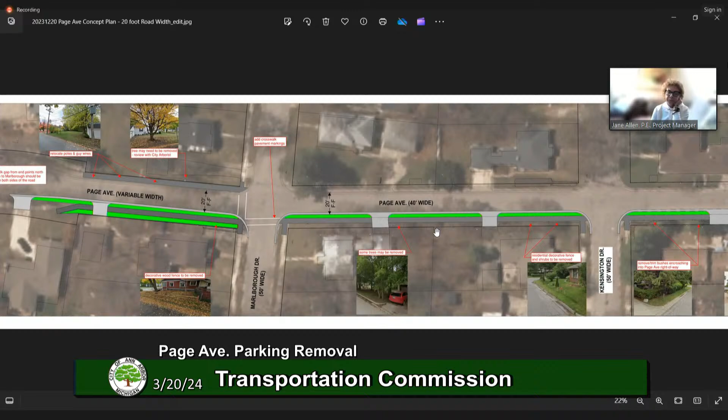So it goes here, and we're going to put it on both sides of the street because they had existing sidewalk up to Esch, so that made sense to finish that block with sidewalk on both sides. Then we have all the sidewalk and 3 feet of lawn extension for signs and a few street trees. We'll negotiate with each resident. It goes up to Harpst, and then Harpst and Esch both have sidewalks, so the system continues. We want to try to get all the sidewalks connected to each other eventually.

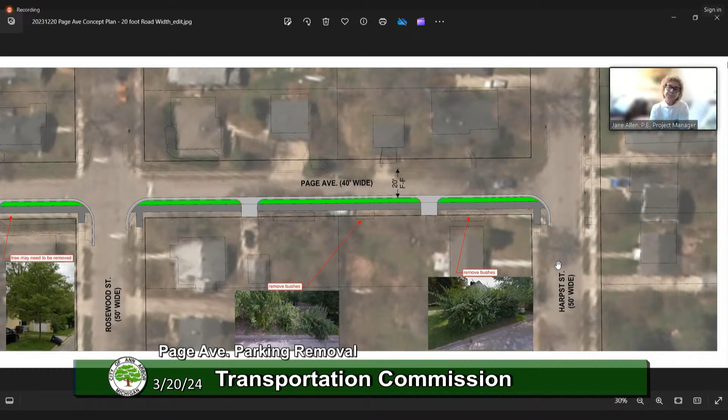Thanks, Jane. If I could add one note, one of the reasons we're bringing this to the Transportation Commission is that there's still a rule on the books that removal of parking for more than one block requires council approval. Since we're removing parking on one side of the street for roughly 3 blocks, this would have to go to city council for ultimate approval. We like to bring these matters before the Transportation Commission to get a recommendation from you all before taking it to council. That's why it's before you today.

One other thing to note is this street is very narrow. We looked very closely at the parking condition, sidewalk condition, all of that, and we feel the proposal in front of you is kind of a compromise, to still allow parking on one side and have a fairly calmed street because of how narrow it is, but also incorporate the sidewalk, which is lacking through pretty much this entire length of the project.

Matt, go ahead. Question for staff: are staff recommending this approach? And I think you said you did some public engagement along the corridor?

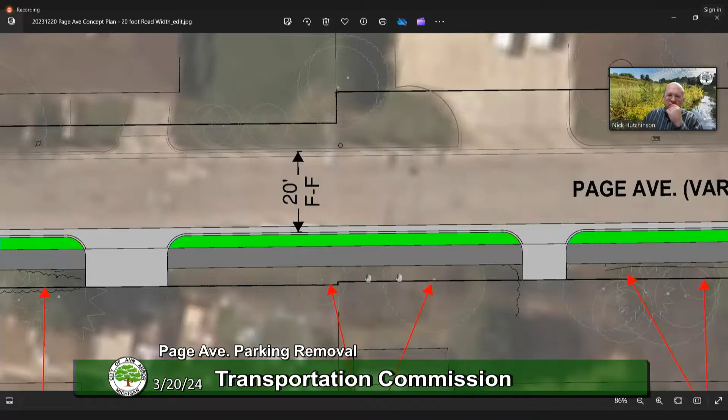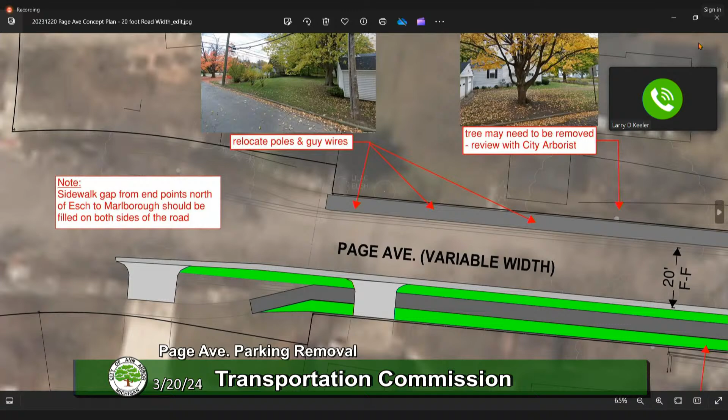I'll add to that. The funding was definitely part of it. We had enough money set aside to build sidewalk on one side, and to try to avoid a lot of those natural features. Moving the curb added a good amount of cost as well. It's a very narrow road, not a lot of space out there. We settled on getting a sidewalk on at least one side so pedestrians along this stretch can walk up and down the corridor. It's not to preclude that in the future a sidewalk couldn't be built on the other side, but it's tight in there, and this was the best we felt we could do for the time being.

So is it being funded by the CIP or from the sidewalk millage? The sidewalk millage. This is being funded from the sidewalk millage.

Peter? Yeah, I was also wondering about the decision to only do the sidewalk on one side. Realistically, when would we come back here and put that in? It will likely be a long time before we come back to put in sidewalk on the other side, because we have many, many miles of sidewalk throughout the city to do. I couldn't predict when we would be back here.

My sense on this is that we have a standard, complete streets, that has sidewalk on both sides, and when we deviate from that standard, it becomes that much more difficult to enforce. In places where people don't want sidewalks, I imagine this will be offered up as an example of a way to do a compromise, even though I don't think it's a good compromise. So that's my concern about coming up with a solution that only has sidewalk on one side.

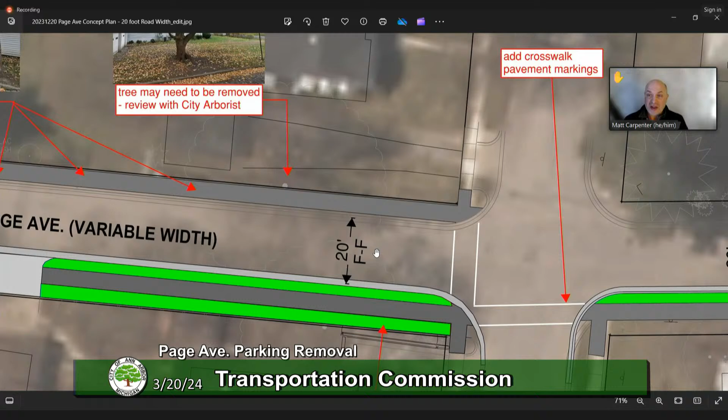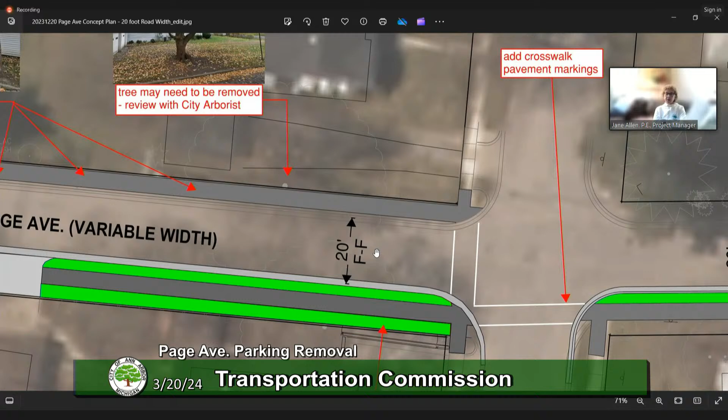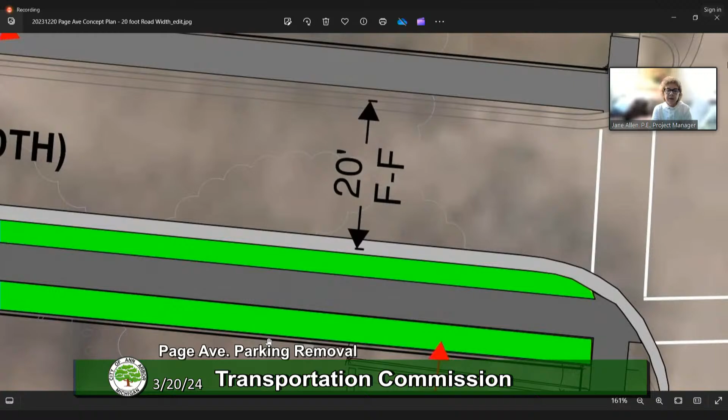When the project came to me, it was already decided to put sidewalks on one side of the street, and it was our job to decide which side that would be on. Possibly Nick could speak more to how it developed. But if you look closely at this 20-foot face-to-face driving lane, you can see the right-of-way, the very dark line - we were able to save some of their landscaping, because originally we were going to put the sidewalk right where that line is, and we would have had to take out a lot more.

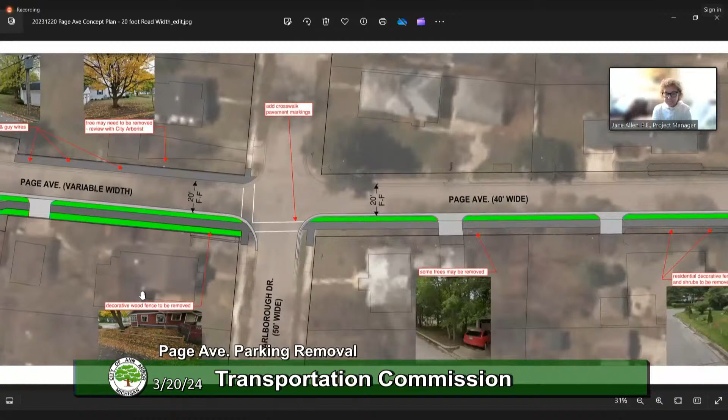Part of this comes down to, we have very limited funds through the sidewalk millage, and we can only do so much each year with the money available. So, is it better to build sidewalk on both sides of this very small residential street, or is it better to build more sidewalks in more places? Funding is limited, so that's part of it.

The impacts on building the sidewalk are quite substantial. That's why we're moving the sidewalk to the east side, to try to create more space to build it there. We'd probably have to do something similar on the west side in order to build sidewalk, which doesn't leave a whole lot of road left either. There are going to be cases where we bring sidewalk gap-filling projects forward where, for the time being, we're only building sidewalk on one side of the street, because the cost of building on two sides is so great that we have to pick and choose to some degree. If we had unlimited funding, we'd be building it on both sides.

I hear you. Yeah, sorry, I just wanted to interject that I did want to confirm that this right-of-way is narrower than most. It's 40 feet versus normally 66 feet.

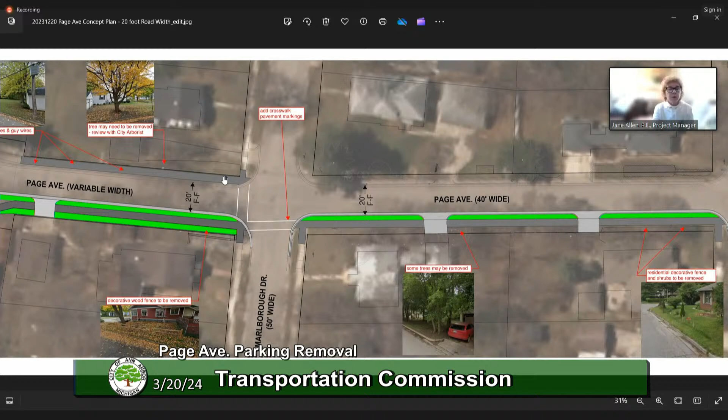We did get a variance to put the sidewalk here, right against the back of curb, because the transportation team didn't believe there was going to be a need for any signs in that location. If we were to do it on the west side in the future, we'd have to do it the same way, since I believe there aren't going to be signs there.

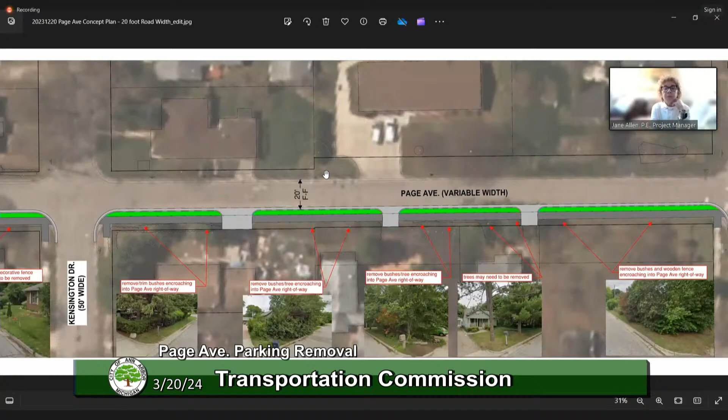So we'll have to get permanent easements from the residents. There is a block here that goes from 40, then it jogs out, one block that comes like half of one block and half of the other. We do have an increased right of way from the plat books, and we could shift the sidewalk within the right of way at that time, but we'd have to get some easements if we wanted to do it on the west side.

In the interest of not letting the perfect be the enemy of the possible, Mr. Chair, I would move to accept the recommendation as tabled.

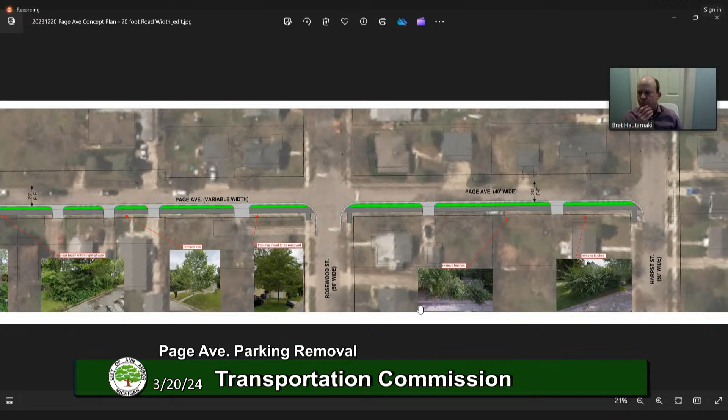Thank you. Peter? Yeah, I think that's probably the right thing to do. I would second that.

I would like to add, Nick, that if we are going to be faced with a situation where our sidewalk millage and the amount of funding we have means we need to make decisions about which side of the street to put sidewalks on in lots of places, then I would really like to see some effort put into decision-making guidelines in advance. I do not want to find ourselves going from project to project arguing about which side of the street the sidewalk should be on, with a lot of discussion and controversy over it. We need to decide what our guidelines are in advance, and then be ready to apply them. If there are places where they absolutely don't work, we can make exceptions in rare cases. But please, let's have some guidelines for that if that's what we're going to do.

Now, back to Matt Carpenter's motion, I would like to second it.

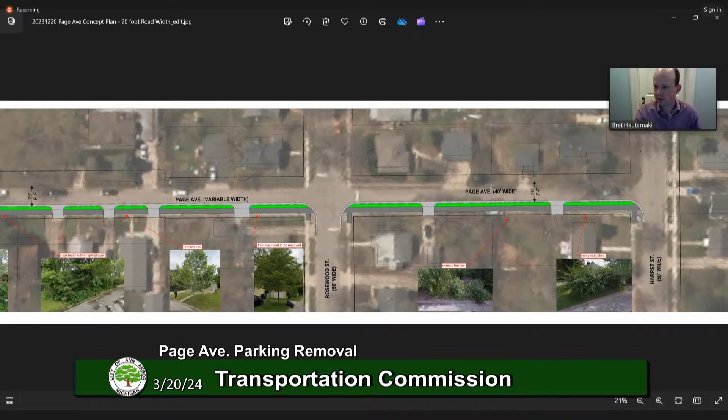So let me get back to the agenda here. What we're being asked to consider for the purposes of this business item is the removal of parking on one side. This isn't really implying approval of the design as a whole, but what we're voting on as a commission tonight is about removing parking from one side of the street.

So, is there any other discussion on the design or the motion to remove parking and send it to council?

Megan: I just wanted to make a quick comment that I live nearby and I'm excited. This is like a thoroughfare, a term we used while discussing it. There's a lot of people walking up and down all the time. So, would love to see sidewalks on both sides eventually, but I understood the limitations. I think this is going to be a good addition to the neighborhood. So thanks, staff. Thanks, everybody.

All right, so is there a motion to recommend approval of the removal of parking on one side of the street on page between Esch and Harpst? Moved by Megan, seconded by Wan Wu. All those in favor of the motion, please say yes or raise your hand. All those opposed to the motion, please say no or raise your hand. The motion passes. All right, thank you.

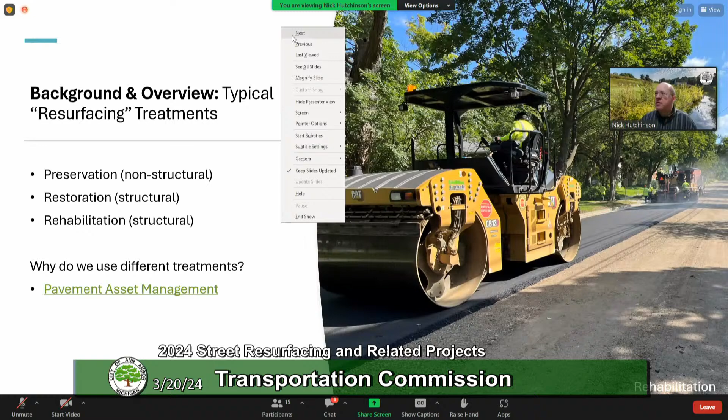Next, I wanted to look at some of the core elements of these treatments. The key thing is to repair or replace the existing pavement surface so that we get a nice, flat, smooth new road.

We do include some curb replacement as needed. That's mostly in those rehabilitations where we're taking off all the asphalt, either to repair curb that's in really poor condition or has shifted out of place, in order to maintain proper drainage.

This type of work is generally contained within the existing road footprint. So while we might be doing a patch of curb here or there, we're not tearing out the curb, moving curb lines, or widening or narrowing roads. For these projects, data collection and detailed design are pretty minimal, which helps keep the cost down relatively low and allows us to do more of them.

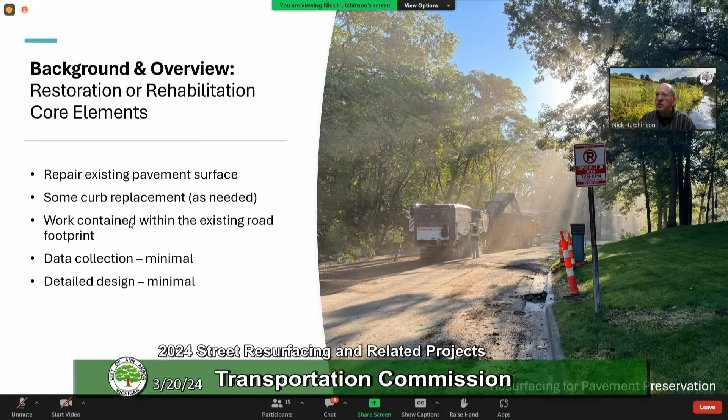Looking at other opportunities that go along with these projects, one is a little bit of work on drainage and stormwater. We may replace some curb to help stormwater flow better, but we also replace some storm catch basins, either to repair or modernize them. We also look at replacing sidewalk ramps that are not compliant with the Americans with Disabilities Act, which is standard practice for any of these resurfacing projects.

And then looking at opportunities to get us in alignment with our Vision Zero plan, and traffic calming and speed management. Many of you will recall that back in September of last year, there was a resolution passed by City Council for us to look at opportunities with all of our resurfacing projects for introducing traffic calming or speed management elements.

We're still working on developing exactly what those criteria are for when we do treatments and what types of treatments we would put in. So this is a bit of a transition year, but I'll talk more on some future slides about some of the things we're doing with our projects this year.

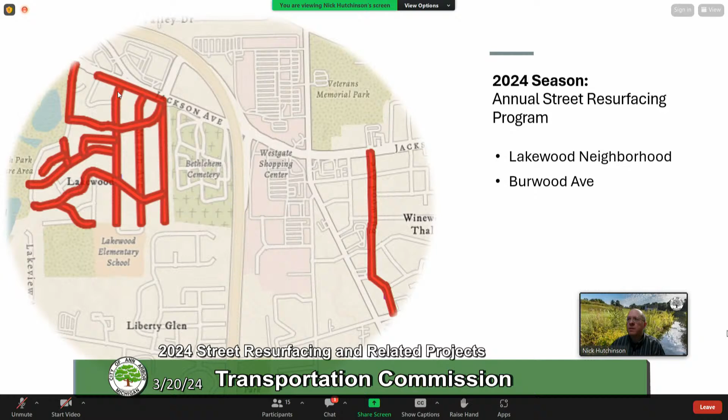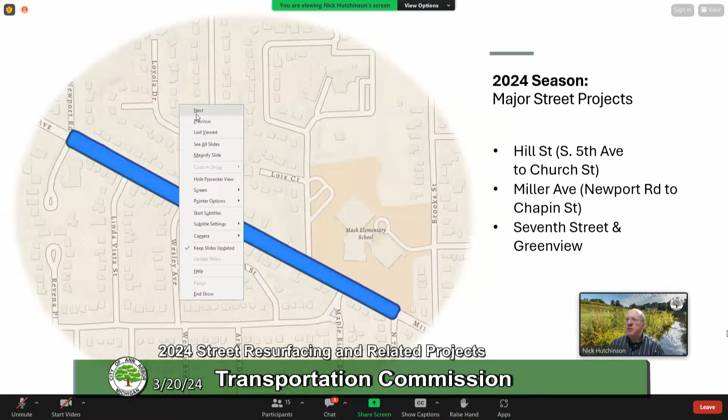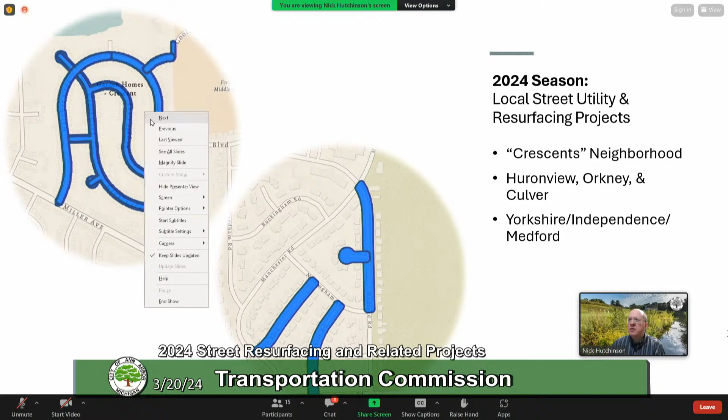We did do a speed study out there. Somewhat surprisingly, there wasn't actually a speeding problem in that area, but being that those streets were leading directly into the school, we decided to add some treatments in that area as well. We're going to be putting some bump outs on those two streets, filling a little bit of sidewalk gap right on one of those intersections as well.

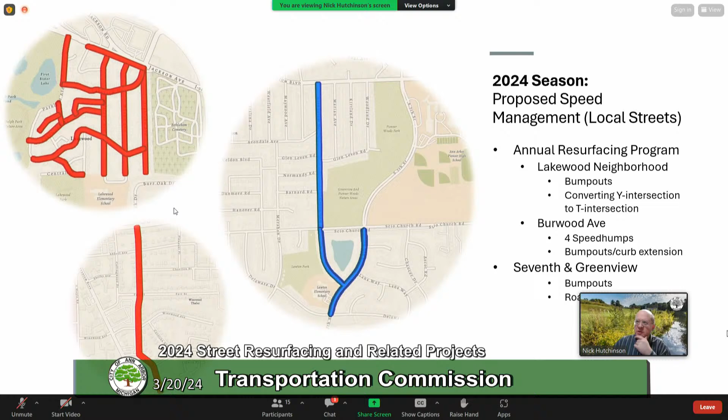So that area is going to get some speed humps, some bump outs and curb extensions as well. Those are some of the highlights of what we're looking to do with our local street speed management, along with our projects this year.

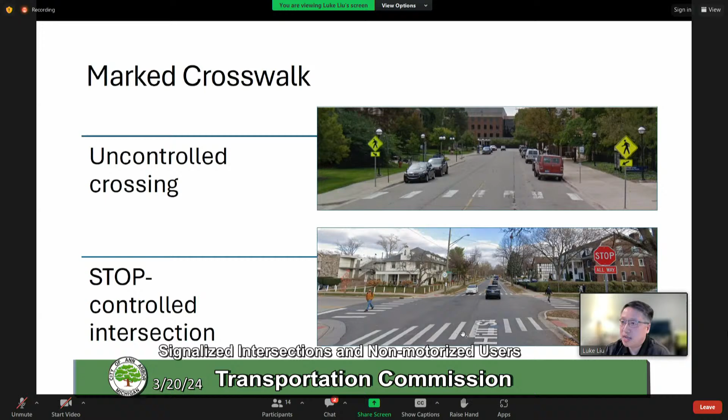For marked crosswalks, the first kind is uncontrolled crossing. What's shown on the right, the top picture, is a mid-block crossing. This is on Fletcher, a marked crosswalk with crosswalk signage. At this location there's really not a turning movement between motor vehicles and pedestrians. The bottom half of the slide shows a stop-controlled intersection, where there's all-way stop control. Under this condition, motor vehicle drivers are required to stop at the intersection and only proceed when it's that user's turn and there's not a conflict in the crosswalk. Moving on to the next slide.

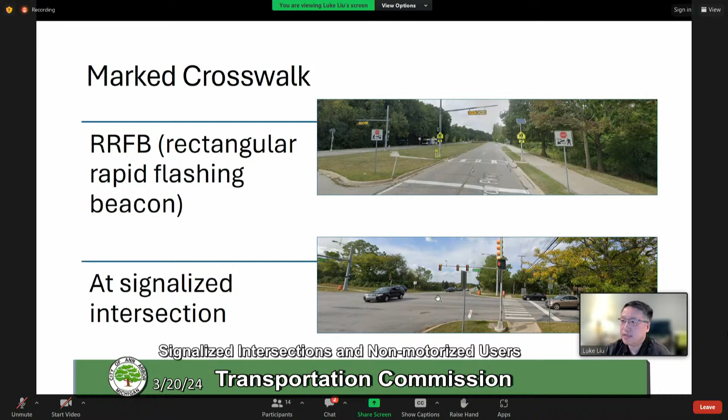In the next slide, this intersection shown on the screen is Eisenhower and Northbrook. At this intersection, we do have RRFB for all the crossings for crossing Eisenhower. So this is a type of control where the intersection is under signal control. Then the left turn driver will still need to yield to pedestrians in the crosswalk.

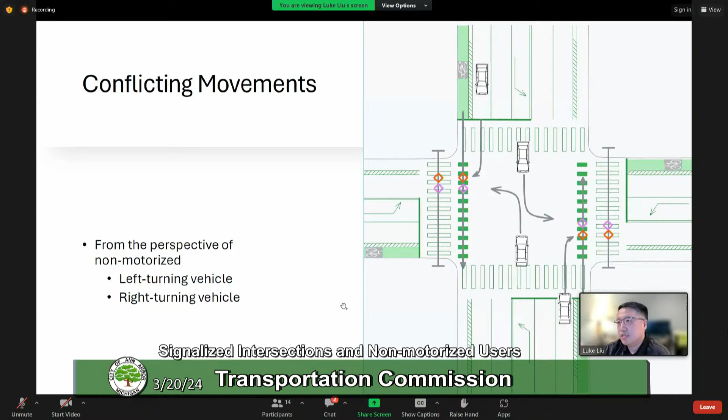Then we'll move on to take a quick look at the safety performance of our system. We scanned crash data, reported crash data from the beginning of 2014, covering slightly over 10 years worth of reported crash data. We first filtered for fatal and A-level, or serious injury, crashes that involve pedestrian users. Altogether, for this period, we have 12 fatal crashes and 82 A-level injury crashes.

Then for the interest of this topic, we further screened those crashes for those that only involve a turning motor vehicle at a signalized intersection. In this case, we come down to 1 fatal crash and 16 A-level injury crashes.

Then there are some more signal-related technical terms here, that's permissive only. So the 1 fatal pedestrian-involved crash at signalized intersection, the motor vehicle was under permissive only mode, meaning it requires the driver to observe and yield to the pedestrian in the crosswalk. And for the 16 A-level injury crashes, 14 of those are under permissive only service.

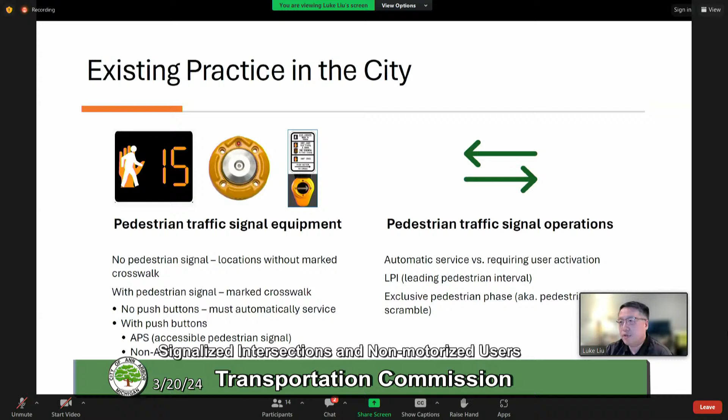Then we'll take a look at some field examples. When I prepared for this presentation, one intersection came to mind that's going to show up a couple of times: Eisenhower and Industrial.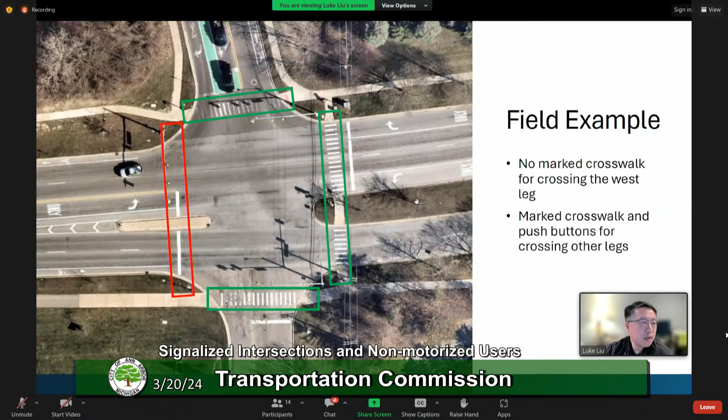On the next slide, we'll look at left turn signal equipment and how it operates. On the left side, I'm showing 4 possible signal configurations for left turn movement, labeled A, B, C, D. For option A, this is really a 3-section circular traffic signal: red, yellow, and green.

This is not really for a left turn signal, it's for through movement. But I place it here because some intersections do not have a specific or dedicated left turn signal, so in those cases users follow the indication specific for through movement.

On the right-hand side of the slide, the labels A, B, C, D correspond to the same labels on the left side, and for operations these labels also correspond to each other. So with label A, this option has no dedicated left turn signal, and the type of operation is permissive only.

Now we move on to option B. This is also a 3-section traffic signal assembly. In this case the colors stay the same, red on top, yellow in the middle, green on the bottom, but the shape of the lenses are all arrows, all pointing to the left. We call this the 3-section left turn signal.

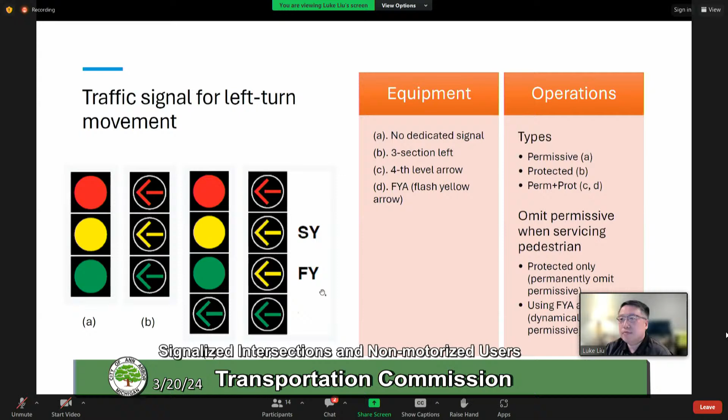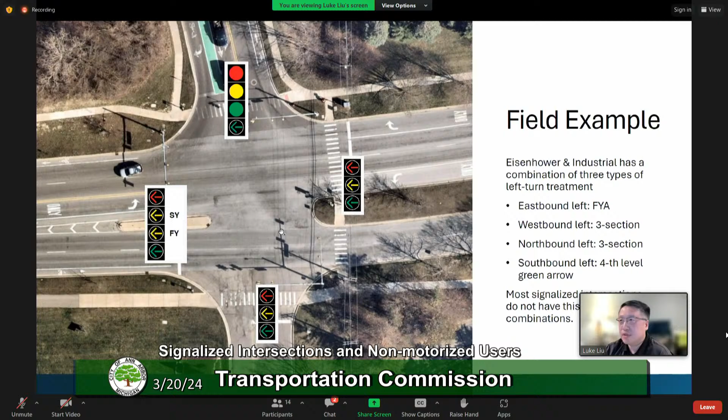The reason I mentioned the intersection of Eisenhower and Industrial is that it has quite a few combinations of left turn treatments at one location. Typically that's not the case - typically we may have all the left turns being permissive or some of those being protected, but this intersection has the combination of 3 options here. So we'll use this one as example.

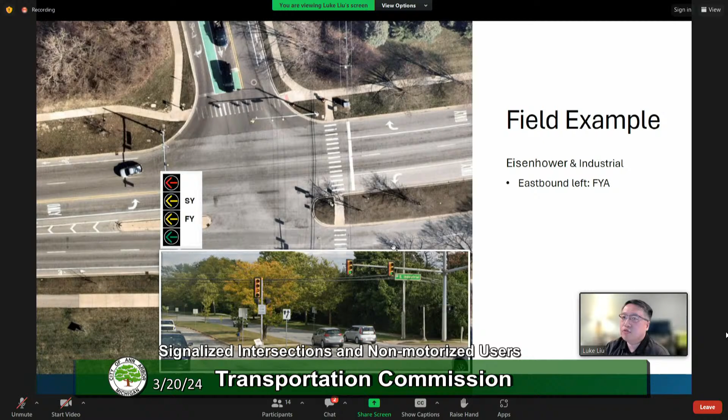A field example of the flashing yellow arrow, coming back to Eisenhower and Industrial: the eastbound left turn movement has this signal assembly.

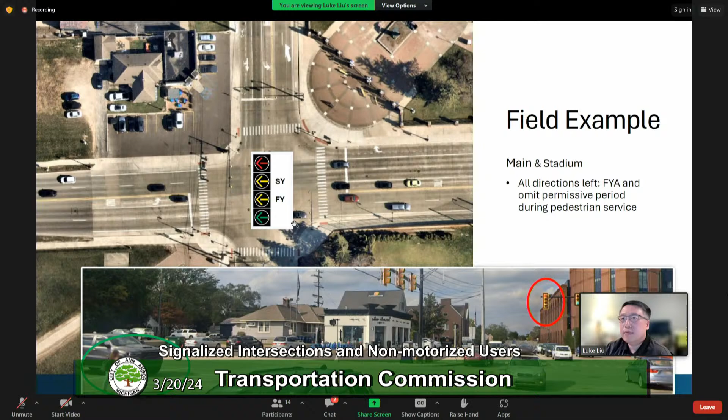We're nearing the end of the presentation. Before that, we take a look at the bicycle signal. Right now there are two intersections in the city boundary with bicycle signals, both under MDOT jurisdiction: First and Huron, and Division and Huron.

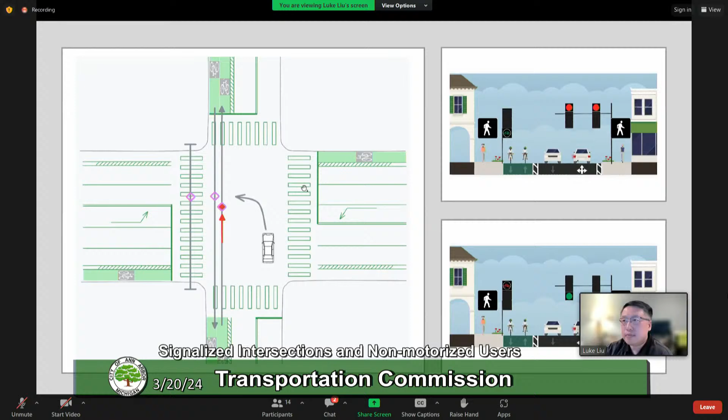In the city, starting from 2016, we started installing hemispherical video detection systems. We first tried the system at the intersection of Main and Stadium to make sure the new technology is sound before we expand its footprint. Our expanded deployment really started after two years of trial use.

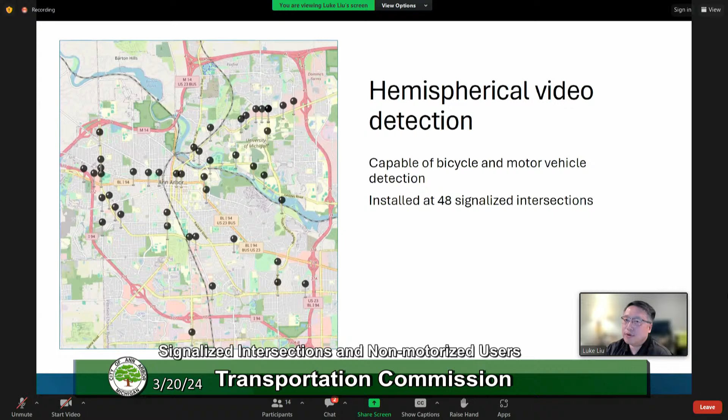Right now we have 48 intersections equipped with a hemispherical video detection system. The advantage is that it's installed on the roadside, so there's no element of the system in the pavement. Also, the video-based detection system can detect bicycle users. There is development at this stage to also cover pedestrian users, but that portion is not proven reliable yet, so we're part of the experiment and we'll decide when the time is right for detecting pedestrians at intersections.

Now we're coming to the final slide of this presentation. For future work, we are exploring all the possible opportunities to expand the installation of APS, accessible pedestrian signals, and also exploring resources to upgrade pedestrian signal heads so they include the countdown function.

Over the past several years, our deployment for RRFBs has always been a couple of intersections or mid-block locations every year, and we'll continue to expand RRFB installations. Bicycle signals are also on our radar, as we do have projects to expand our bicycle network. Bicycle signals are a treatment we are considering.

Flashing yellow arrows and the treatment of omitting the permissive portion using flashing yellow signal equipment, that's another item on our list.

And last, it's for near miss analytics. This is a task under the Safe Streets for All award and project. Right now we're relying on reported crash data and staff observation. The near miss analytics will allow us to tap into near miss events, and hopefully that's going to give us more clues as to how we can operate the system better.

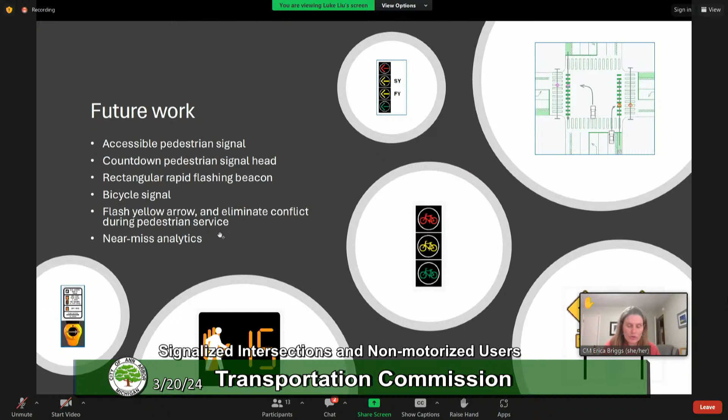Erica? Yeah, thank you, and thanks for that thorough presentation. It's very interesting. A couple of questions. I was hoping you could go back into, this may be covered in the future work in terms of eliminating the conflict during the pedestrian signal, but I was trying to remember back to the pedestrian crash slides that you had up at the very beginning. Sorry for the flicker.

Oh, no, that's fine. And so if I'm understanding that correctly, if I'm inferring things, it's when you have that protected signal, it appears that we're having much fewer pedestrian crashes at the type A level, and that is providing a significant benefit for pedestrians. Is the future work around transitioning more to that protected signal? Can you help me understand that better?

From the crash perspective, we want to take a look at how recorded crash data is showing up. This is primarily showing for permissive-only treatment. So with the historical crash data, the majority of them happen when it's a permissive movement, whether that permissive movement is without a left turn traffic signal or with one.

So in this case, it's showing that for the majority of these, they are under permissive only, meaning there's simply not a left turn signal treatment. So we do have desire to look at intersections as they fit to explore ways to install flashing yellow arrow, meaning that type of equipment will provide the capability to provide either permissive and protected operations, but with the capability to omit the permissive portion when pedestrian users are present.

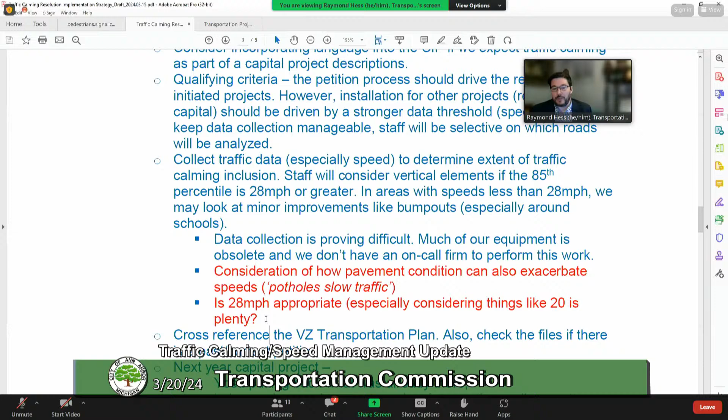We had a lot of internal discussion, and the subcommittee has raised whether 28 miles per hour is the appropriate threshold to consider vertical devices or not. It's something we're still trying to think through a little bit.

Admittedly, 28 miles per hour is somewhat arbitrary. We felt that if folks are doing the posted speed limit of 25 miles per hour, by definition there isn't a speeding problem, so it didn't seem appropriate to incorporate vertical elements. 30 felt too high, so we looked at some midpoint, and that's how we arrived at 28. I won't claim there's a lot of method to that madness aside from what I just explained.

Some other things we mentioned about how we might focus in on areas for possible traffic calming: we can go out and collect speed data, but do we also have a history of past requests, or things identified in the transportation plan? Are there other inputs that could help inform us there's a desire among the neighborhood when we're doing neighborhood resurfacing to consider additional traffic calming? You've already heard this report about how we're already trying to put that into action.

The next resolve clause really talks about making sure we're using best practices. A lot of that is like what we talked about above, but looking at the National Association of City Transportation Officials, the Institute of Transportation Engineers, and Federal Highway Administration to make sure the tools we're using are as up to date as possible.

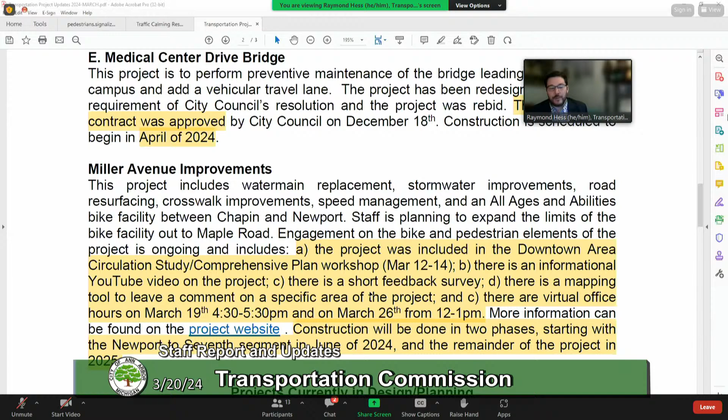We also have a series of virtual office hours. The first one was last night, and the next one is coming up next week, midday. So check out the project website for more details. And then, as you already heard Nick mention, the project is going to be done in two phases, probably kicking off in June, but the majority of the project will probably happen in the following calendar year.

Downtown area circulation study, kind of building off Miller since they were joined at the hip, had very good participation at last week's workshops. We had 4 public workshops and a whole series of stakeholder meetings. The initial estimates are we had over 300 people attend those workshops. Lots of good sticky notes and feedback that we got.

I believe the project website, you can still go in and see all those materials and continue to add sticky notes. I don't know how much longer those will be up though.

Streetlight outages, 307 repairs so far by DTE. Traffic calming on Bird, Arella, and Henry, which you approved last month, will go to City Council in June. That's a function of really understanding what the budget is and how many projects we can support in fiscal year 25, so that's why that's being scheduled for June.

But Mershon, Warden, and Traver have kicked off their engagement, their petition engagement, so all those first meetings are coming up. Mershon is tomorrow night, Warden is April 3rd, and Traver is April 4th.

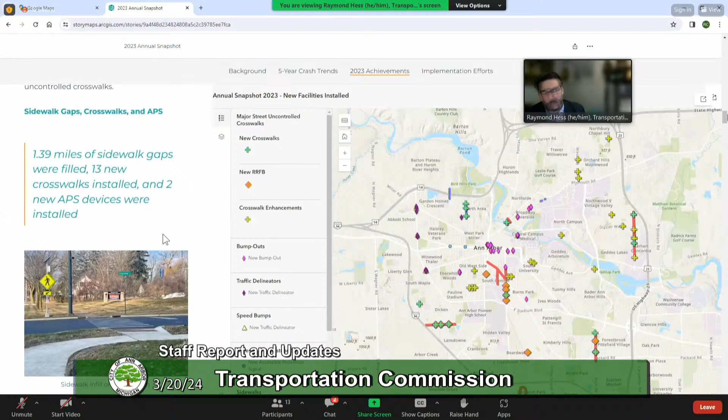The bike network: there were 12.1 miles of bike facilities that were built or upgraded, and 21 bike intersections were improved last year. We launched the bicycle parking pilot and identified those locations.

We talked about the traffic calming petitions that were processed last year and which ones were installed.

After you get through those mapping exercises, you can go through and click on different things as well. It's kind of a nifty little interactive feature.

Then we get into project spotlights, which call out some of the important projects that happened last year. So we focus on State Street, with a nice picture and a brief description about what the project included. We also talk about Scio Church Road.

We talk about the Division Street extension, the cycle track, the Platt Road project, and the quick build projects that were implemented downtown.

Then we also reached out to our partner agencies and asked for updates as well. So the DDA and the Ann Arbor Area Transportation Authority gave us some of those—the DDA on their bike counters and the AAATA on some of the reconfigurations, working with them to make sure we can continue to accommodate transit as well.